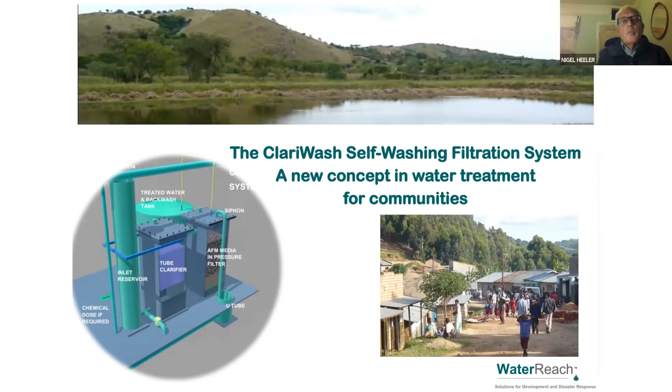So this really is the concept, the Clariwash self-washing filtration system, a new concept in water treatment for communities. And I should say that this is not a household point of use type system. It's not a small community system. It's probably 150 upwards to thousands of people. That sort of size really is what this is for. This diagram on this slide shows the larger size, actually.

So this is basically the system as we have developed it as a pipe system. I thought I would just briefly talk through the way it works, but there is a more detailed part of the presentation which, if people want, we can go into at the end on how it actually operates. But basically the flow, you can see here, we've got the inlet pipe, the clarifier, the filter and the backwash tank, all as pipes with plumbing and relatively cheap to make and get hold of the equipment, basically.

Raw water enters the inlet pipe. It's aerated at the top here with a simple cascade, or you could do a more vigorous eduction of air if you needed it. The flow goes down through this pipe. This basically has a fluctuating level and allows a buildup of water in here, which is used to prime the siphon. The water flows down through the inlet pipe, up through the tube clarifier.

For those of you who aren't familiar with the details of water treatment: if you've got turbulent flow, where there's a lot of movement within the water, it will stir up the sediment and prevent it from settling. And you'll see that in a stream. If you've got a turbulent flow in a stream, you can see all the mud being churned up. And the idea of the tubes here is that there's still flow, so that the streamlines are parallel and the settlement of the particles within that flow increases.

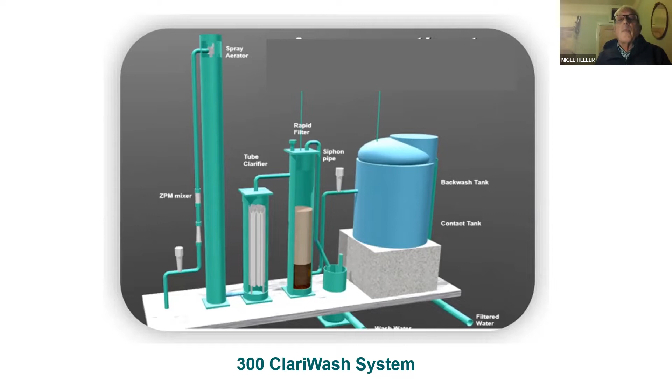So that's basically a very quick outline of how the system operates. As I say, we can do more detail on that with a series of sequence slides if there's time, or not, as the case may be.

So the advantages are listed here. It's suitable for long-term use in improving water quality for communities in developing countries. So the ones in Kisiya Kagaana have now been operating for about 5 years, in Mpanga Gorge, getting on for 3 years, I think now. And there's very little operator intervention to keep them operating.

It's hydraulically automatic, so there's no control system, there's no power supply. You don't need an operator to go and switch a load of valves to do the backwash. So if it clogs up in the middle of the night or in the early hours of the morning, or Christmas Day or something, it'll backwash itself. You don't need to send someone out there to go and do the backwashing. No moving parts, no need for replacement parts.

There's a multi-barrier approach to purification of the water. So if one barrier fails, if you lose your disinfection, for instance, you've still got aeration, clarification, dual media filtration there as well anyway. So you're not totally reliant on one barrier. High grade filter media, AFM grade 0 from Dryden Aqua, is used as a filtration barrier.

That's the fine media. And where possible, the use of treatment chemicals such as coagulants is either eliminated or minimized really. We do rely on chlorination, but hopefully not on coagulants unless the water really requires it. And the self-washing system utilizes established hydraulic principles to periodically self-wash the system, such that both the clarifier and the filter are cleaned in the one cycle. So that's really the advantages of the system.

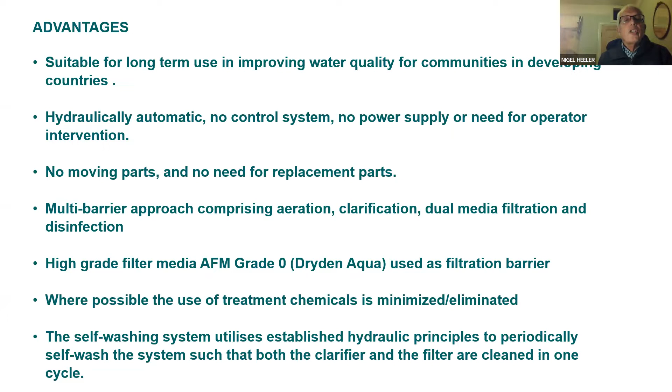Looking at the current formats and locations that we have, just looking at the sizes here, the university rig was a 200mm pipe filter, gradually going up slowly in sizes. The Kisiya Kagaana one, we upped it to 250, but it's really a question of scaling effects. If you change the sizing, then the hydraulics are subject to scaling effects. And I was very nervous about going beyond what had been tested really. So we went slightly up for the Kisiya Kagaana one.

We had actually proven on Kisiya Kagaana that a larger siphon would prime. So we were able to go to a 300 pipe filter at Mpanga Gorge. And then there's a potential modular version, which is a 300 square version, which hasn't yet been produced to date, but could be suitable for mass production. And I'll show you a picture of that one.

And then a sudden step up to 850 square clarifier and filter. And this came about really from a water company in the Philippines, a place called Camarines Sur, who said that they'd read something about the system, and they said, we've got a population of 30,000.

We're supplying them with a water that gets very turbid in the winter and in inclement weather, and we have to shut off the supply. We're chlorinating it, but when the turbidity goes too high, we just basically have to shut off the supply altogether. Could we do one of these systems for that? So it's a bit of panic mode.

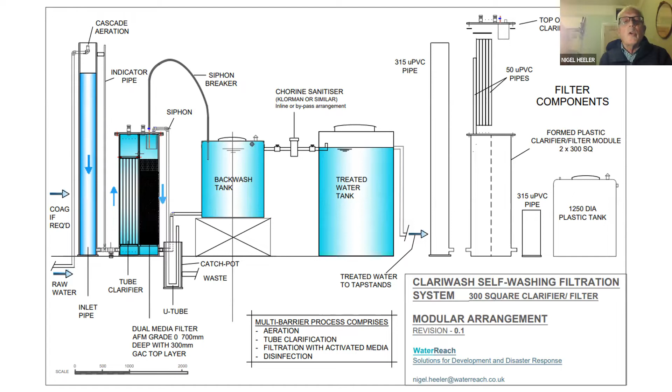And we spent many happy hours sorting out leaks from the tops of the filters, and there's a certain degree of complexity in this lot. So it was done. We probably put 6 filters in about a week, but it was quite detail-intense work. And so the learning from there was really, can we simplify that, make it easier to deploy?

The Kisiya Kagaana one doesn't have the clarifier. If you look at this pipe, I hope you can see the arrow moving up and down this pipe. That basically, in the subsequent design, became the clarifier, because when you looked at the backwash from these filters, it was obvious there was settlement in these vertical tubes, because you've got that coming out early before the filter was backwashing.

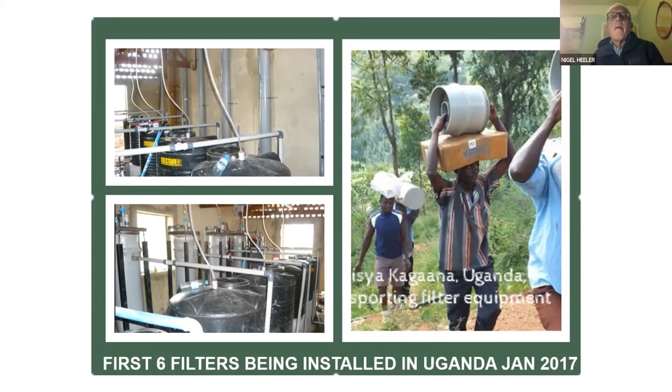And so I just thought, well, why don't we use that and make that settlement zone much more purposeful and actually take out as much sediment as we can early before the filter. And so that's the development that moved into the next stage. The arrangement of the backwash tank in relation to the filters is a bit different in the diagram, just to fit in the building, really.

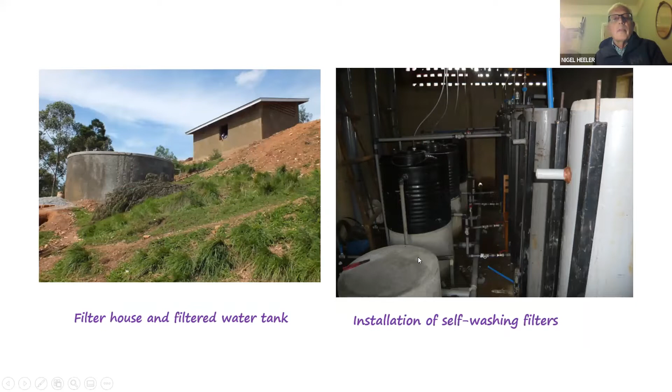So that really was that scheme. I'm now going in a slightly wider field, to bring it back down then to the water, to the Clariwash, because this Mpanga Gorge installation was actually originated as a part of a sustainability effort for Mpanga River restoration.

And they were basically trying to work along this river, which runs from a mountain range in Western Uganda called the Rwenzori mountain range, through a place called Fort Portal, Kamwenge, and then out into Lake George. Those places probably may not mean anything, but it's quite a long distance of many kilometers of river.

And the charity that was doing this was called Protos. It was a Belgian charity, and they were working with a local charity called JESE, which is Joint Effort to Save the Environment, to clean up the river. And the principle was, if the river's clean, the health of the people is improved.

And this was what we did for our church, actually, the River of Life, seeing our lives dependent on water, both the spiritual water, but also the physical water. Caring for others is part of our role as Christians, and creatively finding new ways of dealing with the climate emergency.

And this is a quote attributed to Francis of Assisi: start by doing what's necessary, then do what is possible. Suddenly you're doing the impossible. So this is a picture of Mpanga Gorge in West Uganda.

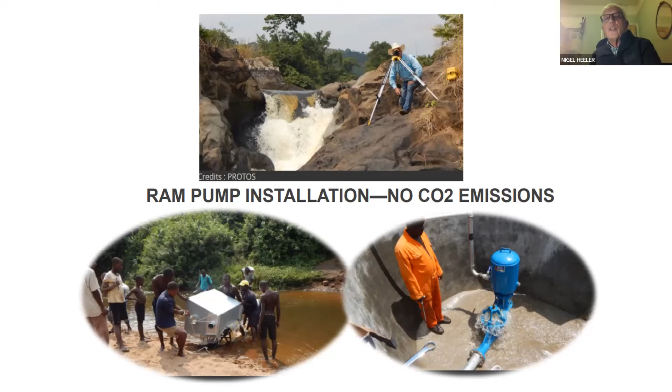And this pumps up to the top of the gorge, which is about 135 meters higher than the river level. But the emphasis here is no CO2 emissions. This needs no power supply to run the pump. And then at the top of the gorge, you have the water troughs for the cattle. So you don't need to take the cattle down to drink from the river, and you have water supply to the villages.

So basically the cycad plants are protected, and the villagers don't need to have that arduous journey to fill up their water cans at the bottom. However, when they tested the water quality, they found E. coli and coliforms in the water.

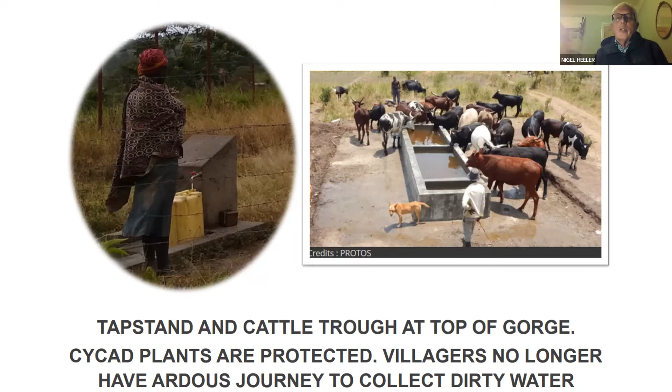And so they were then saying, what could we use that fits in with the hydraulic nature of this whole project? And that's really where we came in with the Clariwash system, because this could be used to work in sympathy with the ram pump. And so the ram pump was diverted into the inlet pipe, and the tube clarifier and filter were installed inside the filter house.

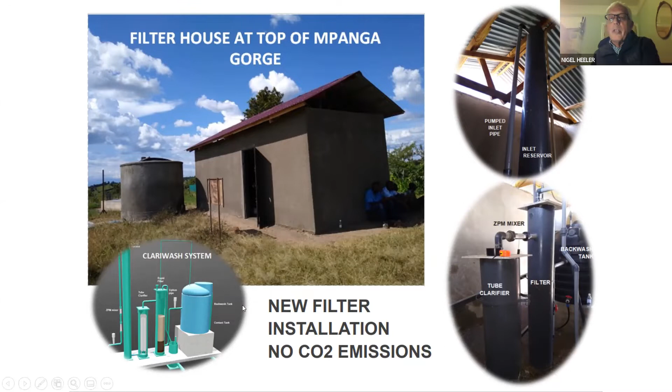As per our diagram, really. And so you can see the pictures of the installation here. And this is inside, looking back on the inlet pipe, the clarifier, the filter. This is the siphon pipe, and this is the siphon pipe coming into the U-tube housing. And a backwash, you could see the turbidity in that backwash flow.

And we found on this that the majority of the turbidity was taken out on the clarifier, and the filter seemed to be performing more of a polishing function. And then this is the Clawman inline sanitizer. This has little chlorine cartridges that you put into the unit, and you can adjust the dose by the screw top here, which has got a gauge on the side to adjust your chlorine dose.

And these need to be replaced every so often. I've been trying to find out how often, without success at the moment, but it does depend on the chlorine demand, and with the filtration, it should reduce chlorine demand. So basically it should be possible to reduce the consumption of chlorine.

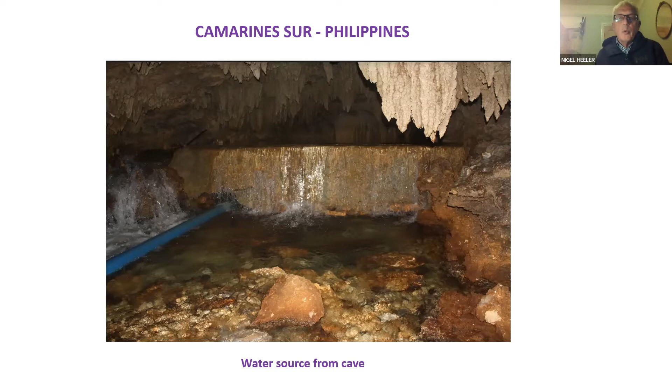And so this is where they wanted us to design the filtration system. They're chlorinating it anyway, but they want to make sure that the turbidity is low enough that it doesn't rise above 100 NTU, which is where they shut off the water supply. So this is really the design of the larger system. So you can see here you've got a much larger inlet pipe. It's 600 diameter.

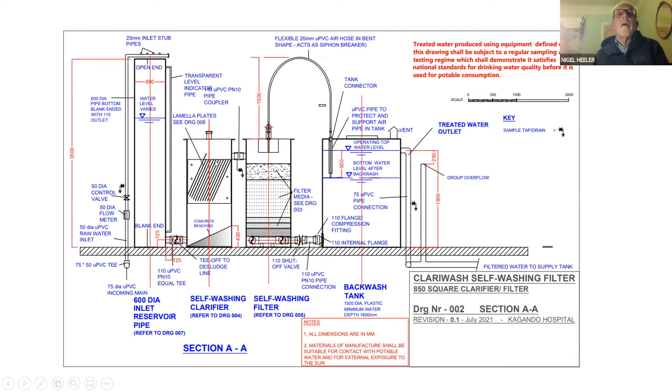The clarifier and the filter are made from the same mold, so it's fiberglass, so that basically you just have the same mold for both for economy. But the lids are different, and the internal fitting out is different. So you've got, in this case, instead of the vertical tubes, parallel plates at an angle, which is a more conventional lamellar clarifier arrangement.

And then concrete benching. So the flow comes in and is turned over, and you get settlement in this area here. The flow goes down through the dual media, the gravel pack, across to the backwash tank, and so on. So that really is the arrangement in more detail. And so to produce that, there would be drawings sent off to the fiberglass manufacturer. They would be more detailed, focused on the arrangements of the fiberglass units.

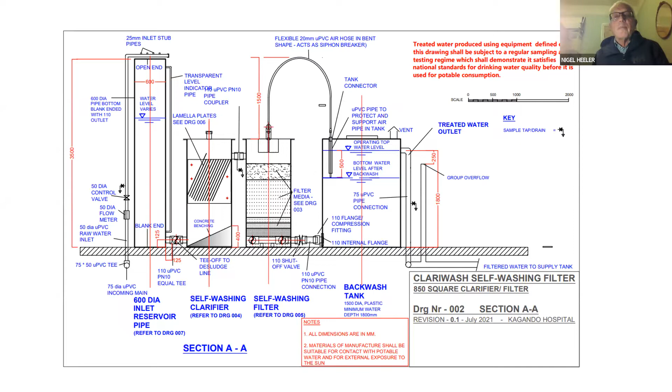But I just now wanted to run this short video clip, which shows the backwash. This is a simulated backwash using a closed valve to simulate the clogged filter, but it does prove that the system does prime. So I hope this will work okay, and you can see this. Let me know if you can't.

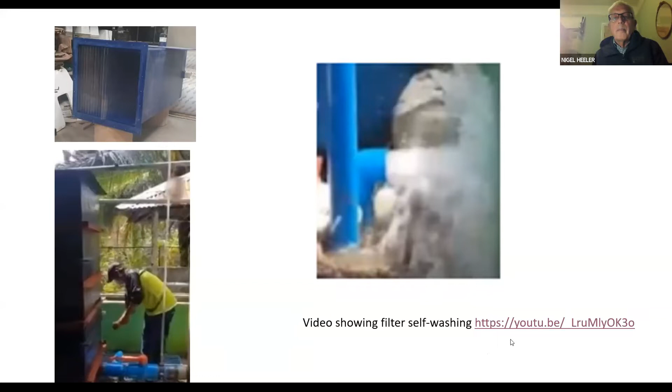Is that visible? Not yet. So this is the inlet pipe you can see here. Sorry, apologies. This is the filter. That's the clarifier. That's the U-tube discharging.

Now, I'm not seeing a video running. You're not. Is anyone seeing a video? I think what's happened is it's popped up on another screen that you're not sharing. So you would have to unshare this and then share the one that's running. Okay, I'll do that then. So I'll stop that share. I'm hoping now I can.

Yeah, so okay, so if I go to... you should be able to find and select your screen with the video on. Yeah, so getting now to here. Sorry about this. It's okay. This one, I think. Does that work? It's not running yet, but try that. You can see that, can you? The video has come up, yes.

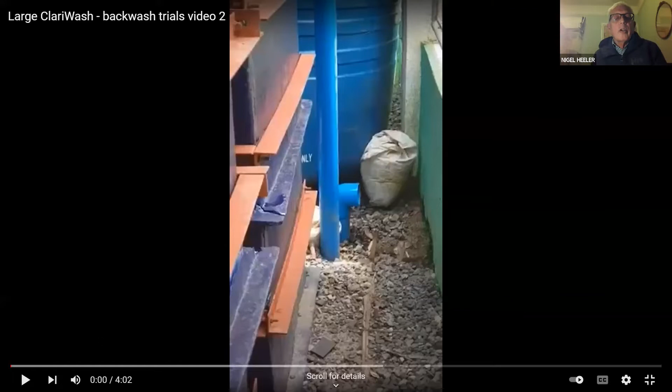Okay, so just before it starts, this is the clarifier just in the very foreground. It's along the side actually. This is the filter, and that's the backwash tank, and this is the U-tube. They put a bend on the end of the U-tube. Sorry, it's not a particularly easy view to look at, but I have got other videos, but I won't go through those. But you can see now. Can you see that running? Yes.

So if I just stop there, you can see this very light grey shape here. That's the inlet pipe, and this small tube is the level indication in the inlet pipe, and you can see the level has built up to somewhere near this bit of string up here to start off with. So we'll carry on playing. So that means that basically you're near to the start of the prime of the siphon. Can you see that okay? Yes.

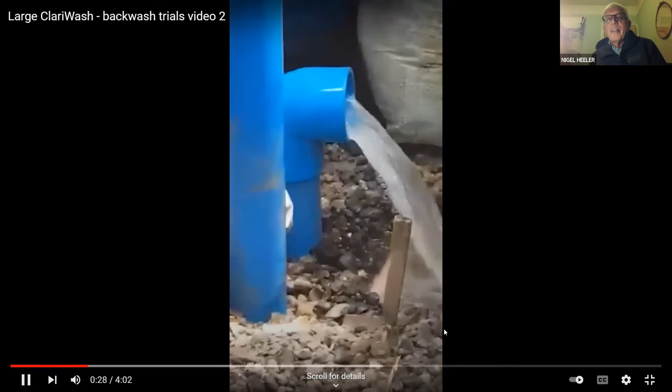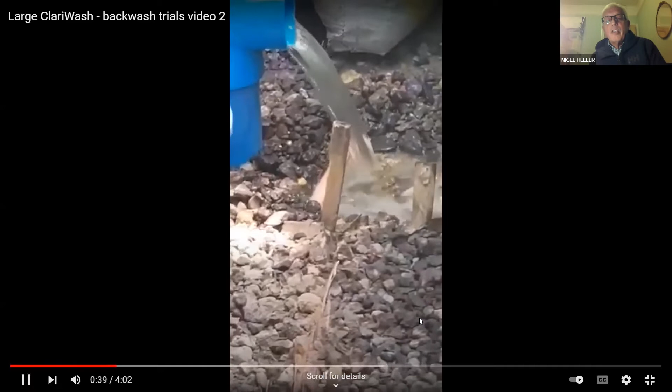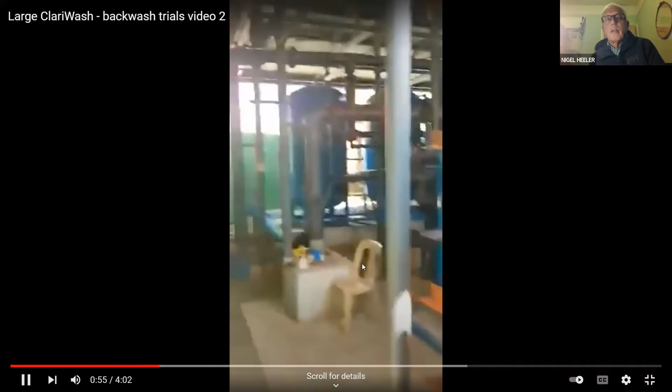So yeah, you can see the initial discharge, which then stops slightly. For some reason, this does occur. There's a sort of hesitation at the beginning, as I think the air is expelled. Yeah, the water level is still at high level up here. Sorry, it's that. And then you begin to see the air being expelled from the U-tube.

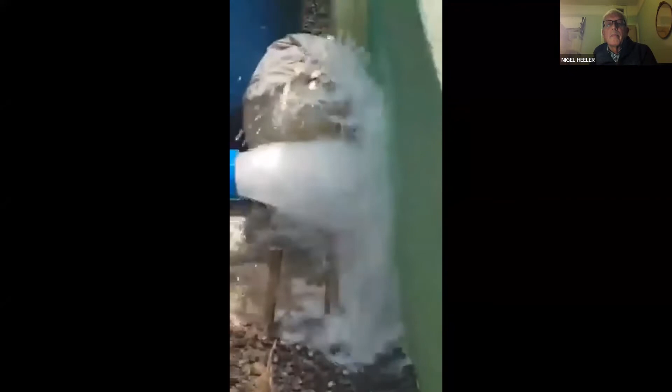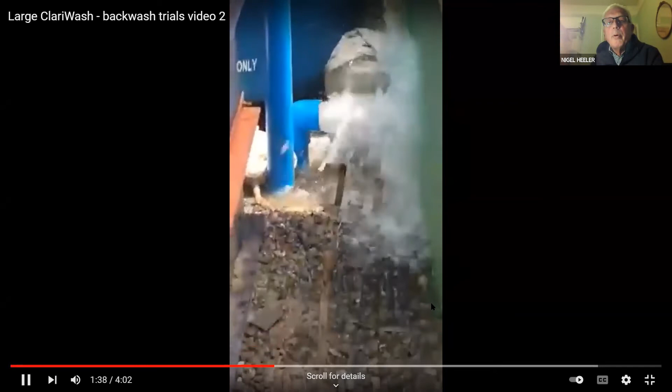So that probably, I think, you can see the water level dropping in the inlet pipe now, quite rapidly. It's about here. It's quite a big flow. Yes. So I think I can probably pause the video at that point, actually, because it doesn't show you anymore, it'll just carry on discharging.

And that discharge was actually at a slightly higher rate than the design. So we're going to have to put a valve on and throttle that slightly, and that will be part of the commissioning to get that backwash rate correct. But yeah, it proved that basically the initiation works. So that's quite a promising stage, really. So I'll go back now to my original slides. Hopefully I'll be able to pick those back up again. Does that show? Yes, we're back to your presentation.

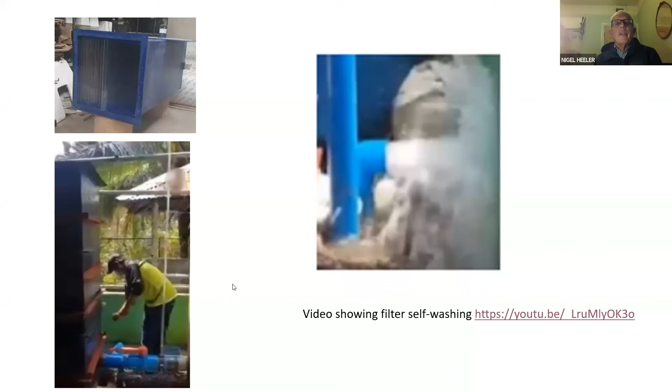Okay, so that's the video of the test in the Philippines, and this now is the design transferred over to Uganda, really. So these are the filter units which have been made in Nairobi. We identified a fiberglass manufacturer in Nairobi; this was all done in the pandemic remotely with a reasonable degree of risk, but it seems like they've come up with quite a good production of filter, at least from the photographs. It's got to be checked out, but the quality looks good.

And so there'll be 3 of these units operating to supply a population of maybe initially 10,000 or so, I think, and then possibly further than that. If Edwin is on the call, he'll probably be able to say more on those figures. But yeah, that would be to provide the hospital, which has terrible water quality at the moment, so it will hopefully be a big improvement on that.

The last thing I was going to mention was disaster response. Because it's a lightweight, compact arrangement, it does lend itself, I think, to being transported in response to disaster situations. If you had these made in advance, in a warehouse or whatever, you could deploy them into an area, set them up on a flat base, put in your media and your lids and commission them relatively quickly, within a day or two, I would hope. And that could be a useful application for the system.

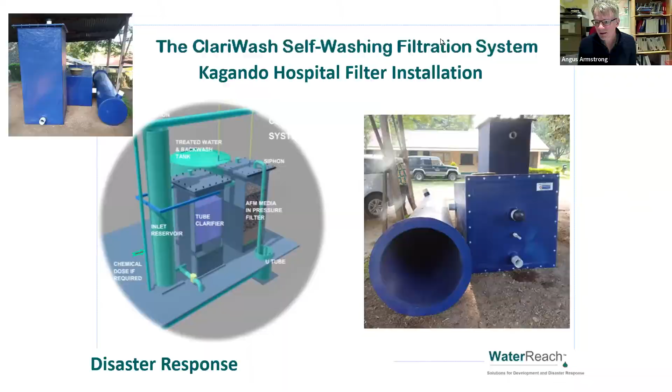So Scott has asked, can you share what the financial cost was for the last system for the hospital for 10,000 people? That was one of my questions as well. Yes, I thought that question might come up. For the manufacture of those units you see delivered, I might need to get my file up, but I think it was about 800,000 Kenyan shillings. Okay. You know what we're going to ask next, don't you? What's the conversion? I'll quickly do that.

Okay, 800,000 you said. Yeah, about 800,000. 1, 2, 3. So that's about £5,200. Yeah, that's about right, I think, for that. But so, the phenomenally exciting thing there, 10,000. That's 52 pence a person. Yeah, I know. It's 52 pence a person.

I just find those sort of numbers absolutely staggering, particularly when we think about what we might spend on achieving a water supply in our own country. Now, okay, you can't make a direct comparison, but 52 pence a person. That blows my mind away.